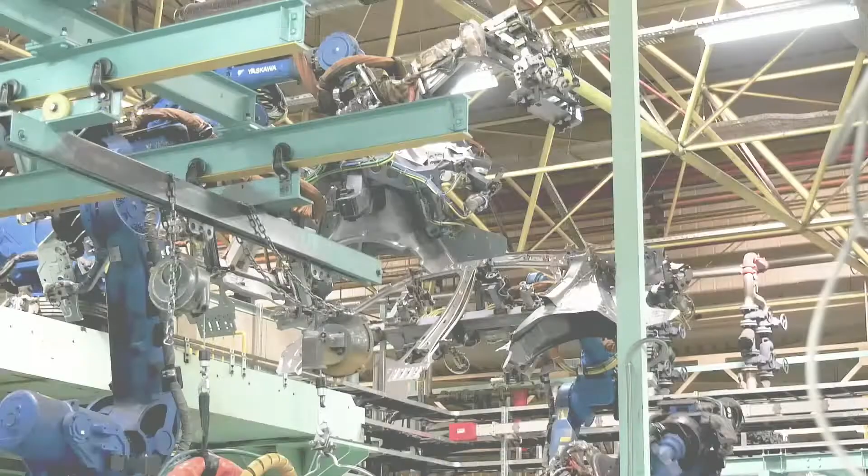Composite industries are most important to generate economy sector in many countries around the world. According to Richard 2005, application of composites in several main industries such as constructions, furniture, aircraft, boats, automotive and many more. In recent years, the application of natural fibers increased, which has been used as reinforcement in thermoset composites, where it is affordable and lightweight materials used in various industries such as automotive, furniture, food packaging and other industries. Furthermore, the application of epoxy resins in fabrication of composites has increased recently in manufacturing industries. Nevertheless, epoxy resins are naturally fragile and derived from petroleum resources which is non-renewable.

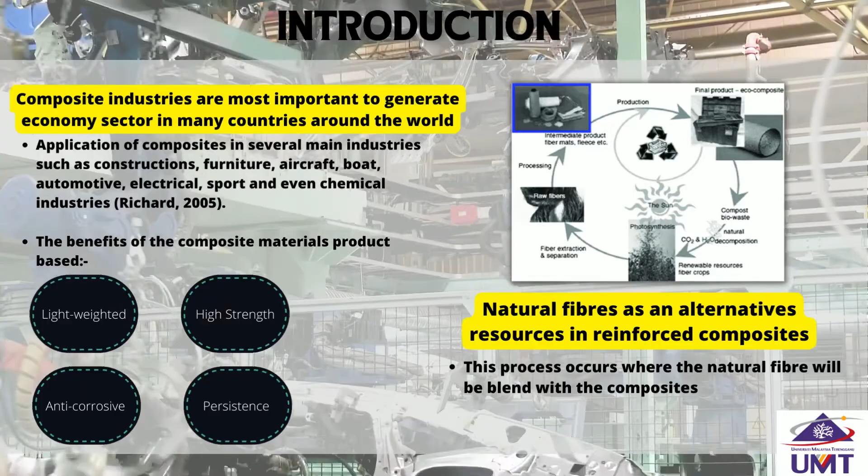Those are the problem statements in this study. First, using synthetic epoxy resin is still considered not environmentally friendly. Therefore, epoxy resin based on renewable resources is firmly required. Nonetheless, vegetable oil-based epoxy resins have some limitations rather than petroleum-based epoxy resins.

Second, the effect of synthetic fibers could cause numerous environmental impact issues that contribute to this revolution. Therefore, the use of natural fiber as reinforced composites is strongly needed in order to sustain our environment.

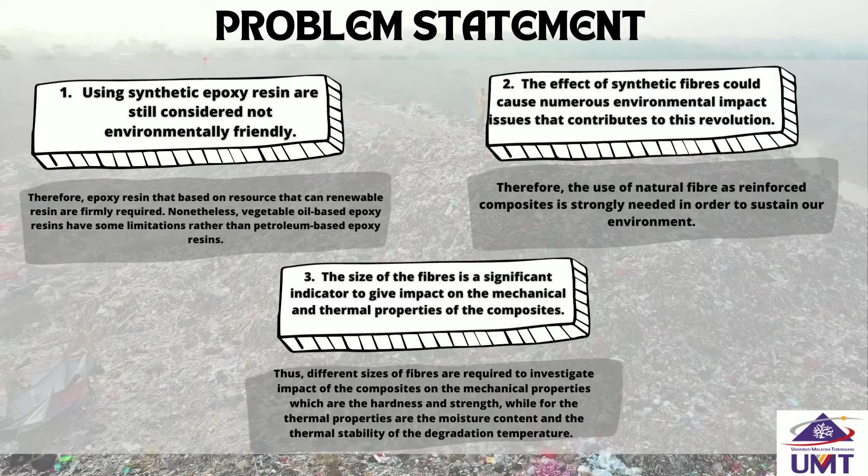Third, the size of fibers is a significant indicator to give impact on the mechanical and thermal properties of the composites. Thus, different sizes of fibers are required to investigate the impact on the composites on mechanical properties, which are hardness and strength, while for thermal properties are the moisture content and the thermal stability of the degradation temperature.

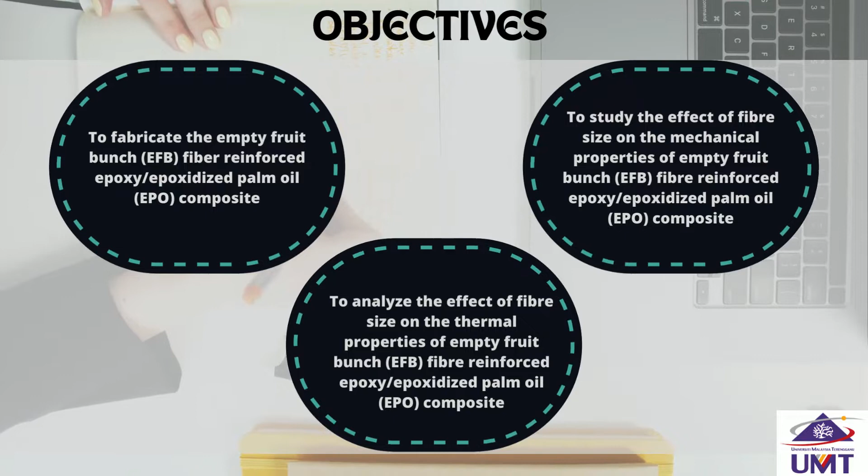The objectives of this study are: first, to fabricate the empty fruit bunch fiber reinforced epoxidized palm oil composite. Second, to study the effect of fiber size on the mechanical properties of empty fruit bunch fiber reinforced epoxidized palm oil composite. Third, to analyze the effect of fiber size on the thermal properties of empty fruit bunch fiber reinforced epoxidized palm oil composite. Scopes of the study.

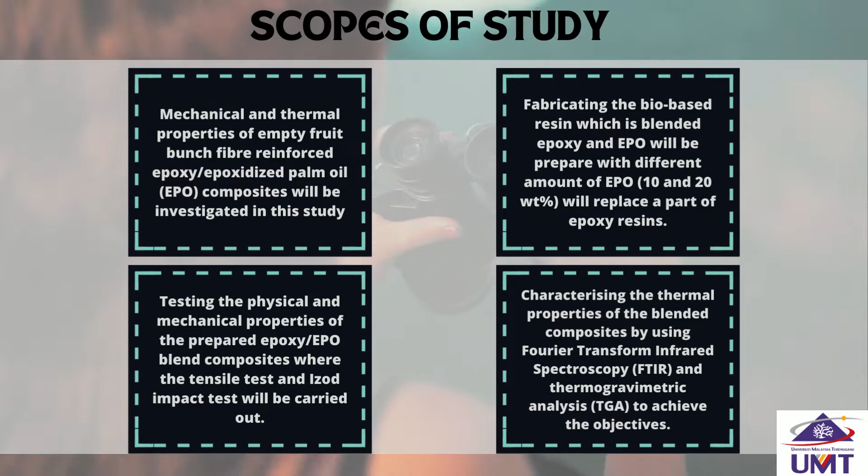First, fabricating the bio-based resin, which is blended epoxy and EPO, will be prepared with different amounts of EPO, which are 10 and 20 weight%, to replace a part of epoxy resins. Second, testing the physical and mechanical properties of the prepared epoxy EPO blend composites, where the tensile test and Izod impact test will be carried out.

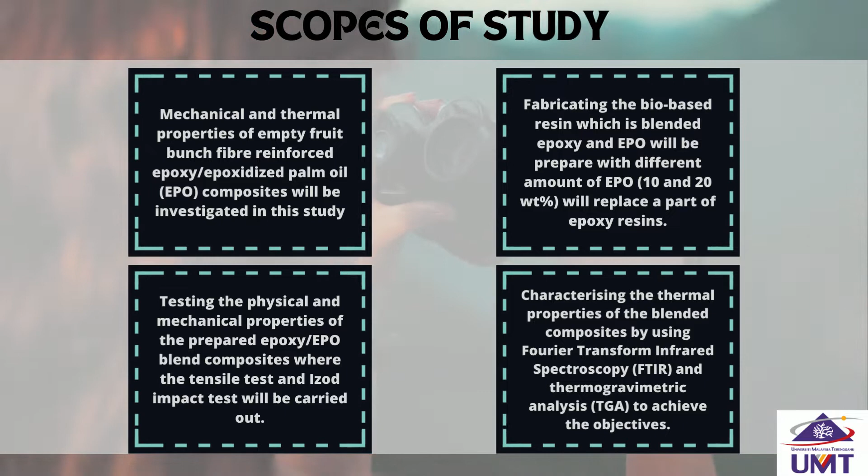Third, characterizing the thermal properties of blended composites by using Fourier transform infrared spectroscopy (FTIR) and thermogravimetric analysis (TGA) to achieve the objectives.

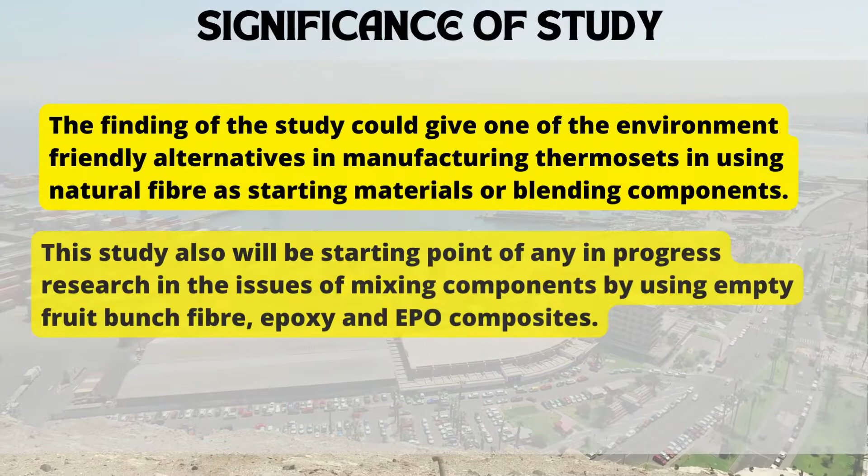Significance of the study: the finding of the study could give one of the environment-friendly alternatives in manufacturing thermosets by using natural fiber as starting materials or blending components. This study will also be a starting point for any in-progress research in the issues of mixing components by using empty fruit bunch fiber, epoxy and EPO composites.

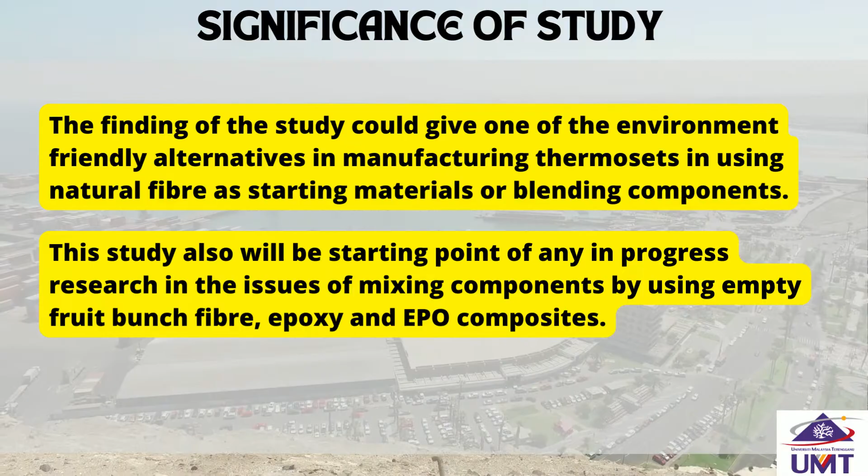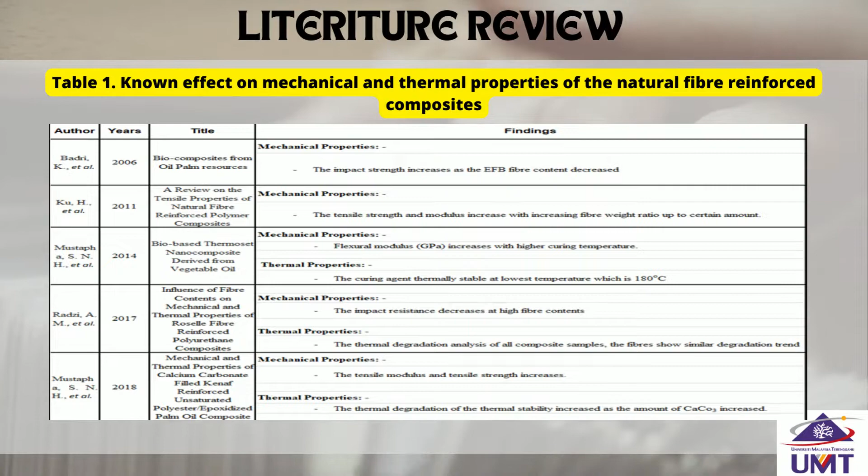Those are the previous studies that show the effect on mechanical and thermal properties of the natural fiber reinforced composites, which could support this study.

In this study, the natural fiber, which is empty fruit bunch with different sizes of 1 cm, 2 cm and 3 cm, will be used as reinforcement in epoxidized palm oil composites. The fiber will be treated with sodium hydroxide.

Next, the mixture of epoxy and EPO will have hardener added. Then the treated fiber will be mixed together with the epoxy EPO composite and laid on the open mold. Lastly, the curing process will be done by pre-curing at 80 degrees Celsius for 2 hours, and for the post-cured process, at 110 degrees Celsius for another 2 hours in the oven.

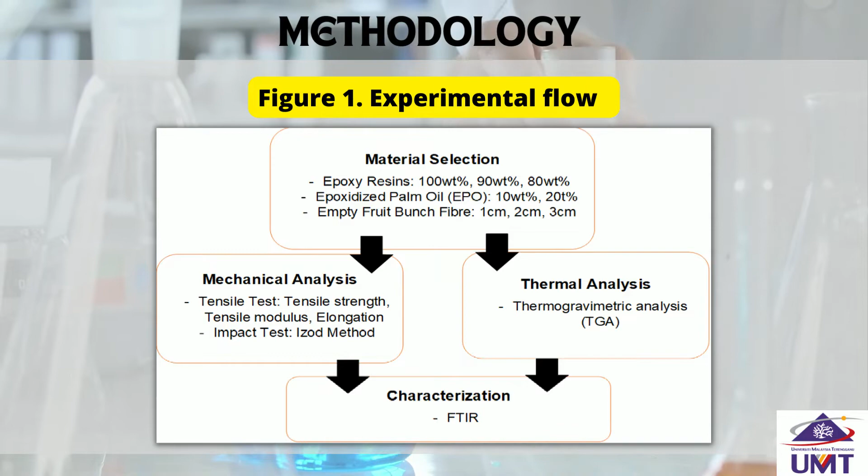The mechanical and thermal properties will be recorded, where the tensile test, impact test and thermogravimetric analysis will be conducted. Those are the sample preparations for the fabrication process at Makmal Bendalir UMT.

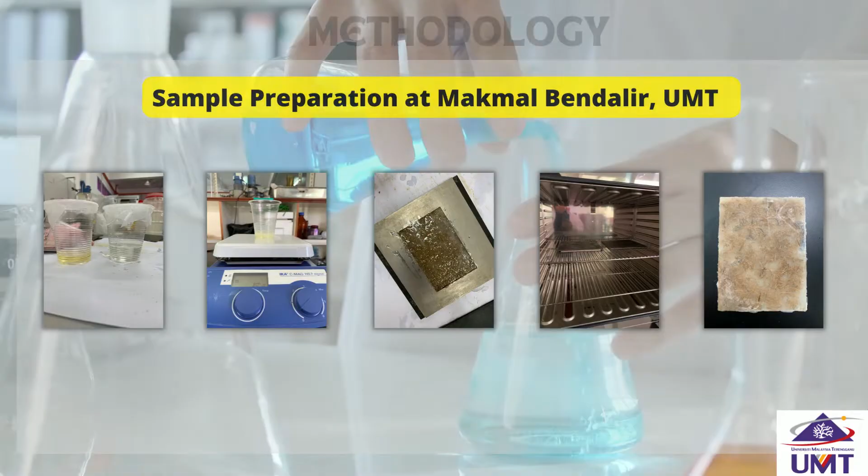Ramli 2011 stated that the decreased result in tensile strength occurred due to the composite matrices and the EFB fibers' weak interfacial adhesion or interaction. Moreover, irregularly shaped fibers such as EFB fiber with shorter fiber length employed in the study may not be able to withstand stresses imparted from the polymer matrix, resulting in a decrease in tensile strength as the fiber size was increased.

Next, clearly between neat epoxy and epoxy EPO composite there is quite a different gap. In the presence of a high amount of EPO, weak spots may exist at the end of the free chain for the nucleate voids.

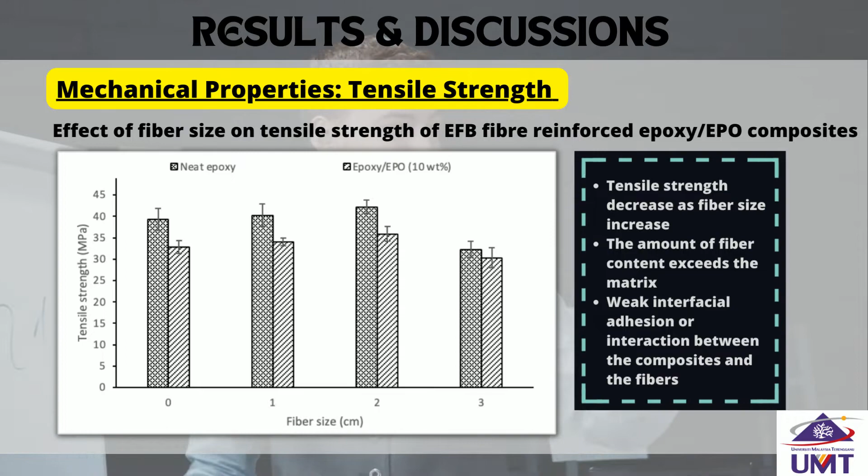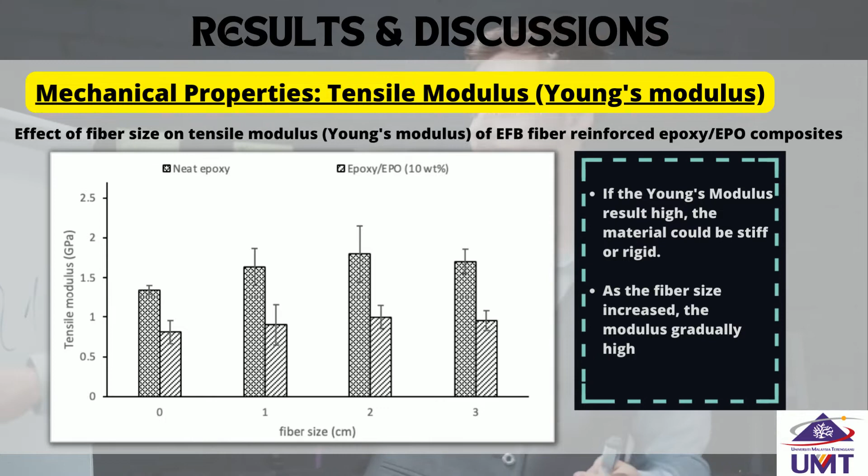If the Young's modulus is high, the material could be termed rigid or stiff. Based on theory from previous studies, as the fiber size increased, the modulus also gradually increased because the fibers are stiffer than the matrix. The tensile modulus result in this study shows that the fiber size of 2 cm is the most rigid for both neat epoxy composites and epoxy EPO composites.

Free chain ends may provide weak spots for nucleating voids under stress at amounts of EPO, reducing elongation at composite break. Another explanation is that the EPO reduces intermolecular forces and increases chain mobility, improving the flexibility of the blends. Furthermore, according to Bledzki 1998, there is a crucial fiber length in short fiber reinforced composites that

must be met for the fiber to achieve its completely strained condition in the matrix. If the strained fiber is shorter than the critical length, it will be adhered from the matrix, resulting in fiber breaking at low composite strength.

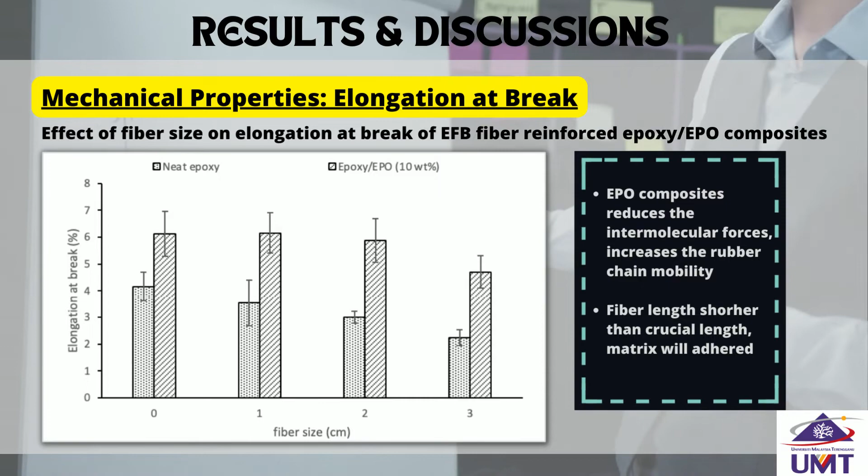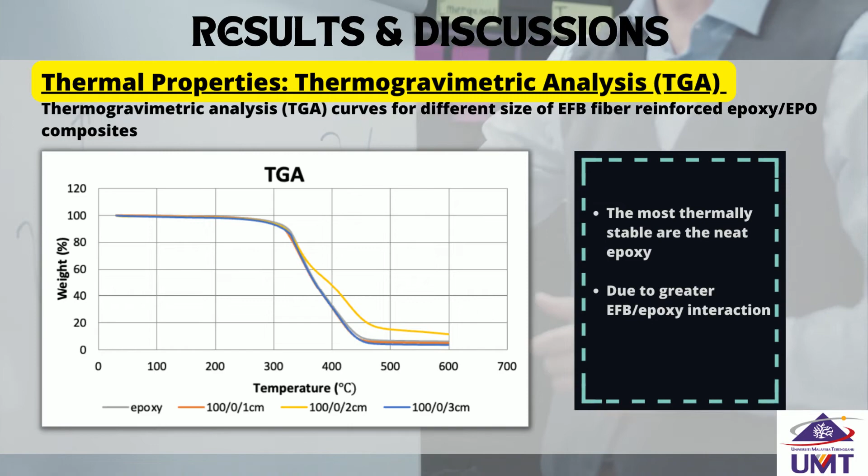Based on the TGA curve, both the neat epoxy composites and the EFB fiber reinforced epoxy composites have the same pattern of thermal stability. However, the neat epoxy shows slightly higher thermal stability rather than the EFB fiber reinforced epoxy composites. This makes the neat epoxy the most thermally stable. This happened because of the greater EFB epoxy interaction, and the properties of the fiber are easily combusted. Thus, it shows that the composites that contain fibers have low thermal stability.

As a conclusion, this study will achieve all the objectives based on the following results. First, the fabrication process for empty fruit bunch (EFB) fiber reinforced epoxy composites was achieved by using the open mold technique. Second, the mechanical properties for the composites, the tensile strength and tensile modulus, gradually increased as the fiber size increased. However, the results started to decrease as the fiber size exceeded 2 cm.

This happened due to the fiber content exceeding the matrix, and the fiber matrix adhesion weakening. Since the EFB fibers can resist a larger size while spreading a smaller size into the epoxy matrix, composites reinforced with EFB fiber have better tensile strength and Young's modulus than the neat epoxy composites.

As for the elongation at break, neat epoxy composites have more elongation at break than the EFB fiber reinforced composites, due to their lower tensile strength and modulus.

Third, according to thermogravimetric analysis (TGA), compared to EFB fiber reinforced composites, neat epoxy composites have significantly higher thermal stability. This happened due to the fiber existence making the composite less thermally stable, since the character of the fiber itself is easily combusted.

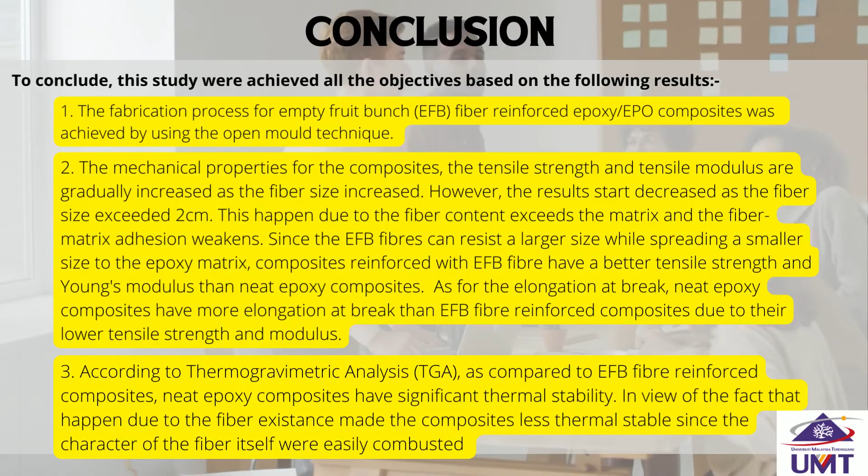For further study recommendations, this study is expected to provide a collection of facts and information that will encourage further research into other natural fiber composites, such as kenaf, flax, sugarcane, and jute fibers.

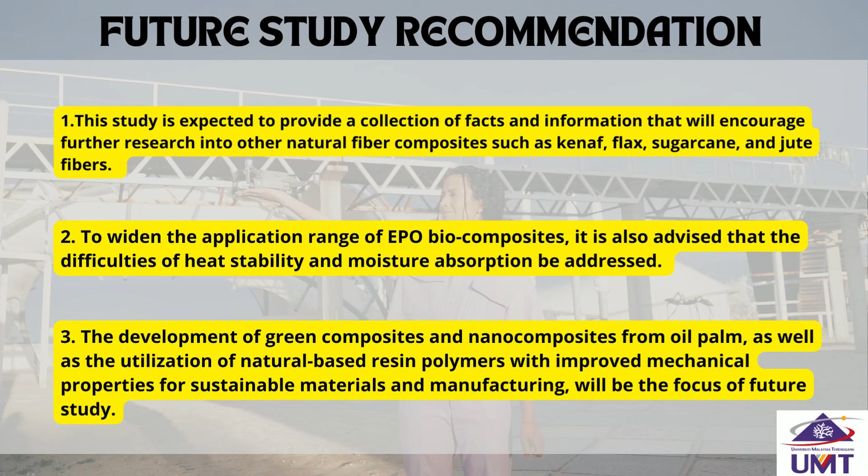To widen the application range of EPO biocomposites, it is also advised that the difficulties of heat stability and moisture absorption be addressed. The development of green composites and nanocomposites from oil palm, as well as the utilization of natural-based resin polymers with improved mechanical properties for sustainable materials and manufacturing, will be focused on for further study.